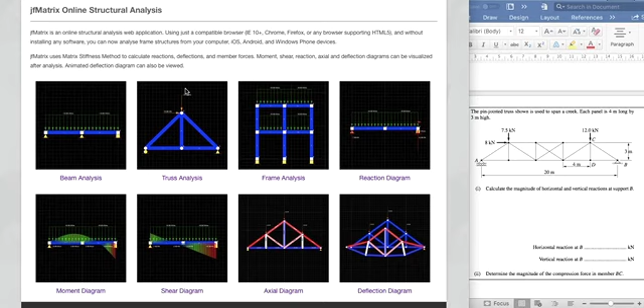Click on truss analysis. If you create an account, you'll be able to save your trusses, if you don't need to.

The diagram has 4 metre spacings horizontally and 3 metres vertically. If the dimensions were 30 or 40 or 50, you could just scale it. So these are nodes, members, supports, forces, and you can zoom in and out, move around.

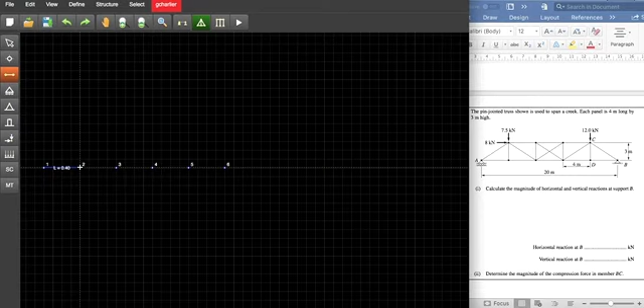You can change your view to line view or back if it glitches and things disappear. Now I'm placing members using the member tool, counting up 1, 2, 3. You can also place your nodes just with the member tool. Press escape to break it.

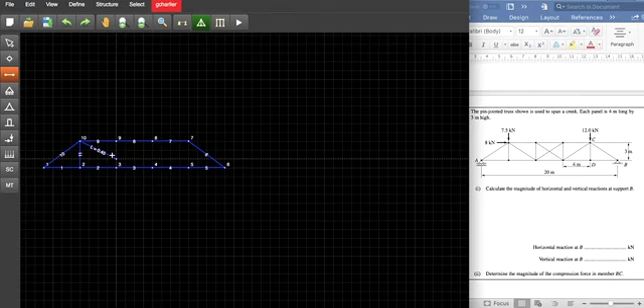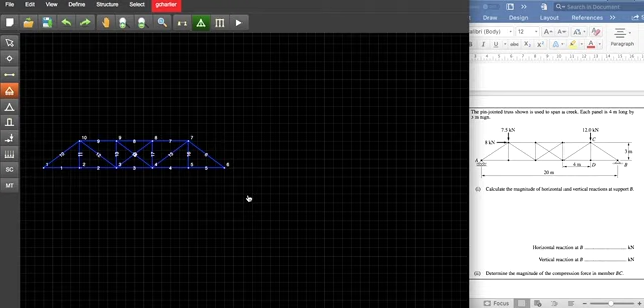Then we'll place our supports. We've got a hinge support, which is a pin joint, at the right hand side, and a roller on the left hand side.

Now roller Y means it can support a force in the Y direction, so it's rolling horizontally, which is what we want. Roller X can support an X force or a horizontal force, which would be used for hangers.

Placing our forces: 12 kilonewtons going down. These units are in kilonewtons, so nothing horizontally, and 12 in the Y direction. Here we've got to provide 7.5 vertically and 8 horizontally. So right and up is positive.

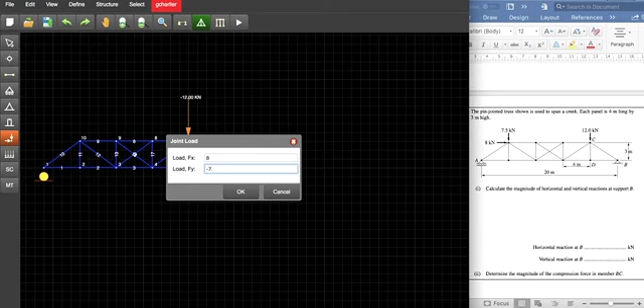We change to truss analysis and click play or analyze. Initially it works out the resultants. So we've found 7.2 and 12.3 and 8.

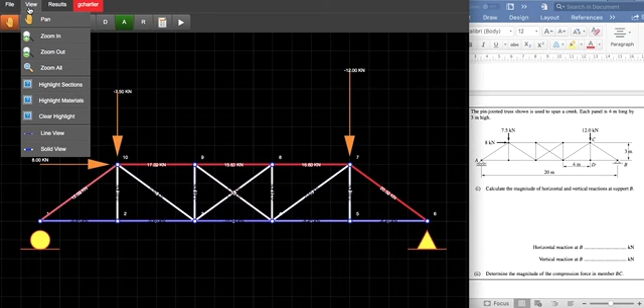If we click A, it will show you the forces in each of the members. Change the view to solid view to make it a bit clearer.

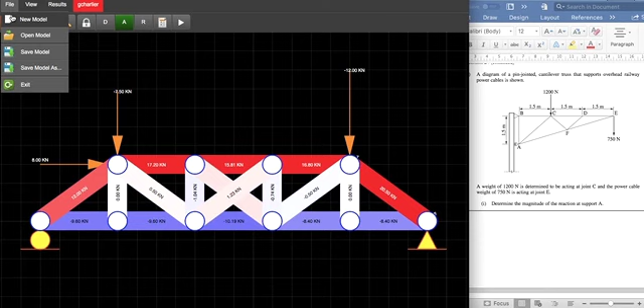I'll also do an example where we've got some hanger-style ones. New model - no, I just won't save that.

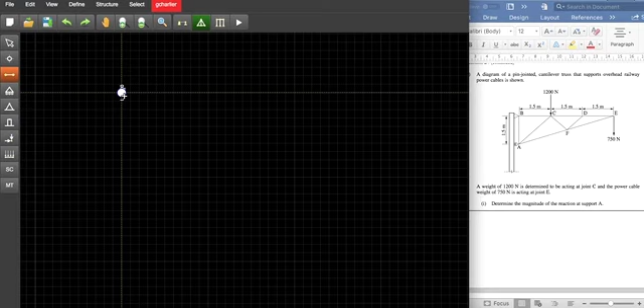In this example, we need to draw 1.5 metres. I'm going to zoom right out so I can use 10, 15. So 10, and then 1, 2, 3, 4. There's 15, so that's 1.5.

And that would be one lot of 15, two lots of 15 - I need to zoom out. So one lot of 15 is 1.5 metres, two lots is 1.5 metres, and then another lot of 1.5 metres.

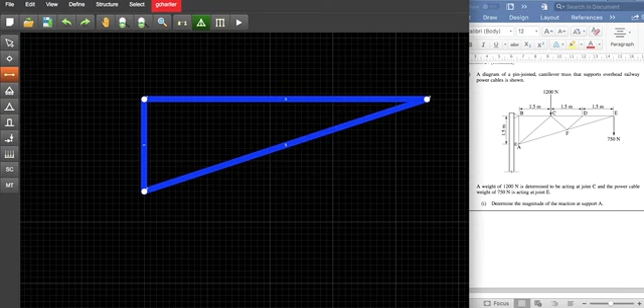Change the view to line view, it's a bit easier. So at 1.5 metres, beam here.

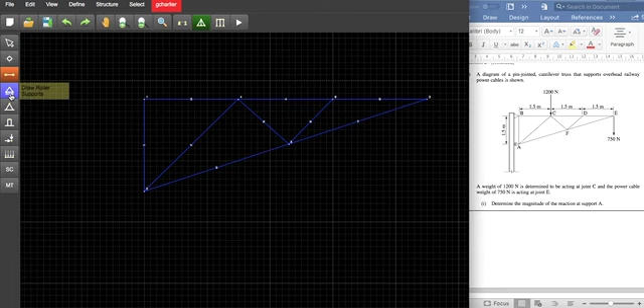Placing a roller, but I need to choose roller X so it can support a force in the X direction, for the roller at joint A, and a fixed joint at B. It's drawn like this, but it's a fixed joint, so it doesn't matter anyway.

Placing a vertical load of 1,200 newtons, so that's 1.2 kilonewtons. Getting the load window back up, so 75... 0.75 kilonewtons.

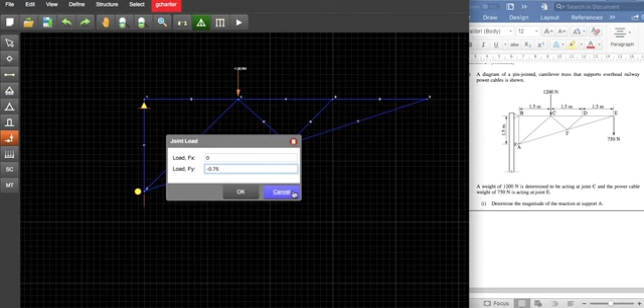Solving for the resultants, we have 3.45 kilonewtons here at A, 3.45 horizontally here at B, and 1.95 vertically.

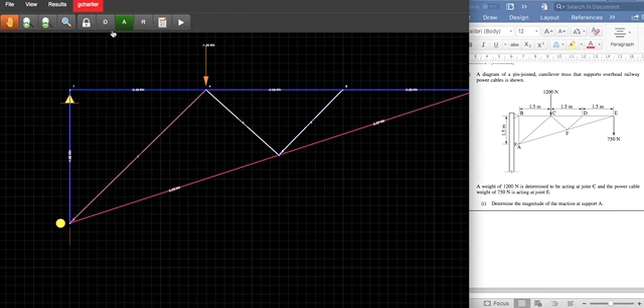Changing to analysis of the forces inside the beam shows that, yep, sure enough, these were zero load members. The HSC question asks us to find the force in AC. Changing the view to solid view to read it: 1.7 kilonewtons, which can be got just by analysing this one joint.